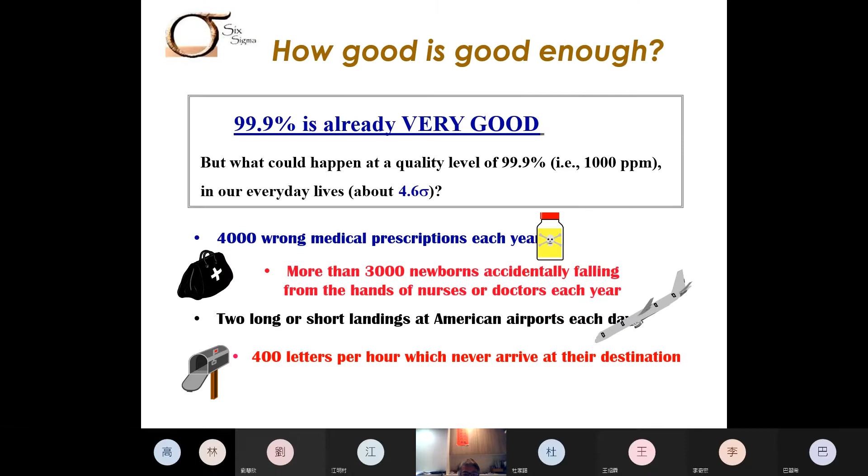So think, can you see the screen? Yes, teacher. Yeah, I think no, I need to get it larger. Is that better?

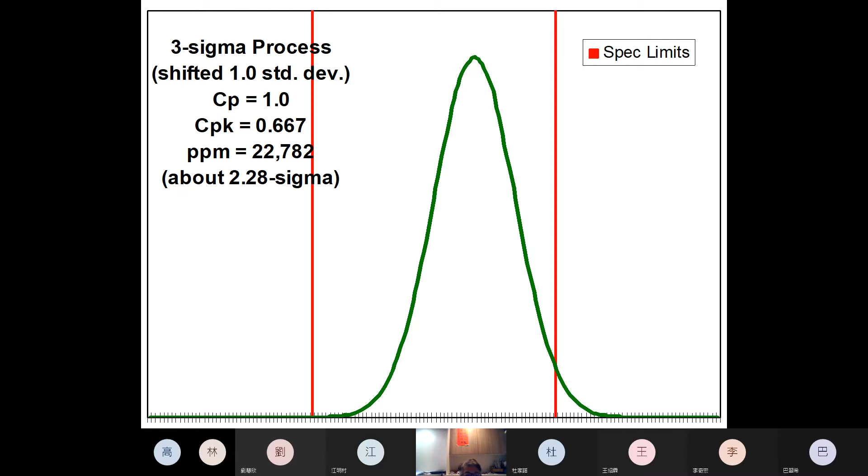Okay, so let's get started. We have last time where we're getting at. We're getting at MSA. Which page are we getting on?

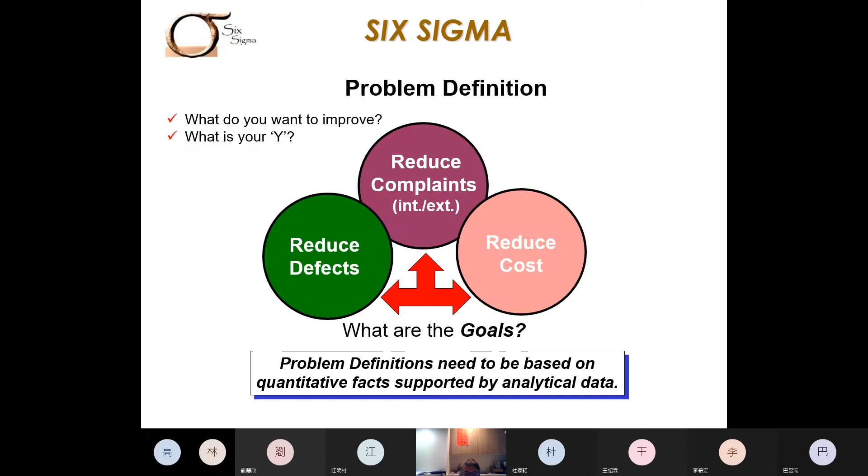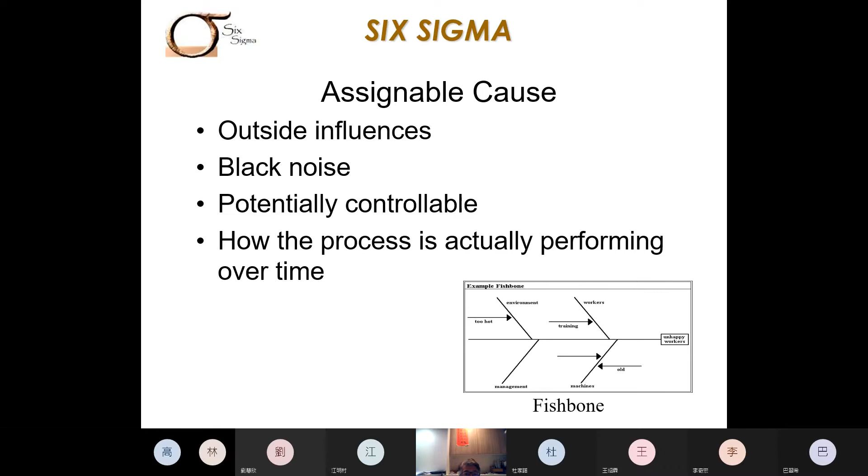The baseline. Not this one. Yeah, we have done this, right? The outside, the noises, potentials, the common causes, gauge. We mentioned this before, right? Did we? Yes. Okay, so it's this page we're getting on, right?

We're getting at. So map the process. So map that means, okay. So please also open your text dialog box. So this is the mapping the process. Try to characterize the process.

The characterize process, that means we know we need to understand the interrelationship between the x and the y's.

So actually, we always ask several questions. What problem happened and how it happened and why it happened and when it happens. So typically, we ask this kind of question, try to identify what kind of problem we try to solve.

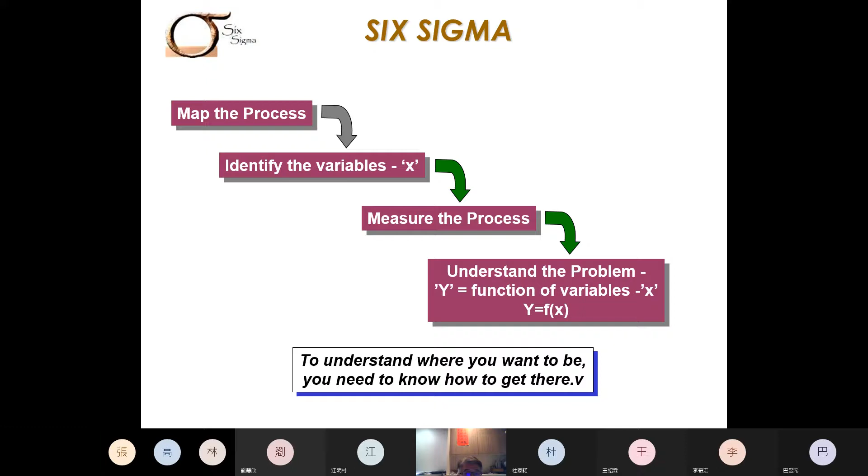Have you recapitulated? Okay, then we move on. So now we are in the process moving to the stage of evaluate. We understand the process, we take the measurement, and we like to evaluate how we can understand the process—we call it process characterization. Once we have a basic understanding of the process, then we try to improve and verify the process, and maintain the process. This is how this working loop for Six Sigma goes.

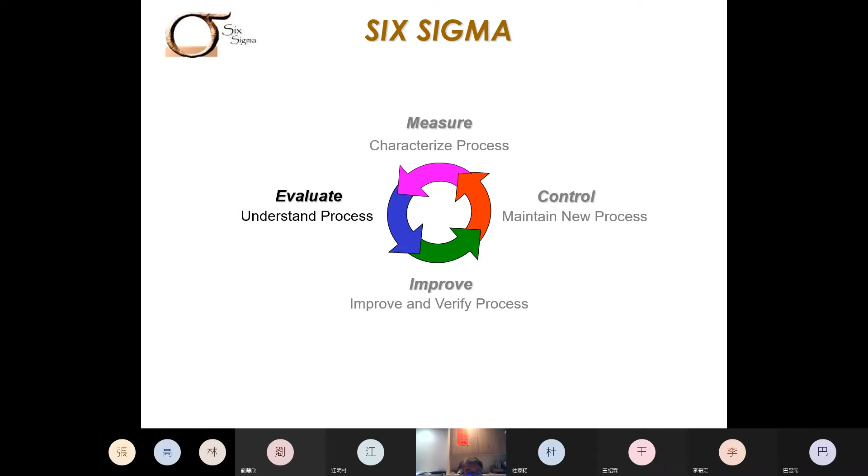Okay, then in many cases, the process capability—we mentioned this. Would some of you like to share what is the process capability?

Okay, so what is the process capability? Will anyone of you like to share your idea with us? Meng, would you like to share with us? Sorry, I don't know. Okay, process capability we introduced.

So process capability, that means when we like to accept the order, and manufacture the product for our customer, the customer is going to have a specification. The process capability is used to determine: are we capable enough to accept the manufacturing order from our customer? Are we able to make a qualified product for our customer?

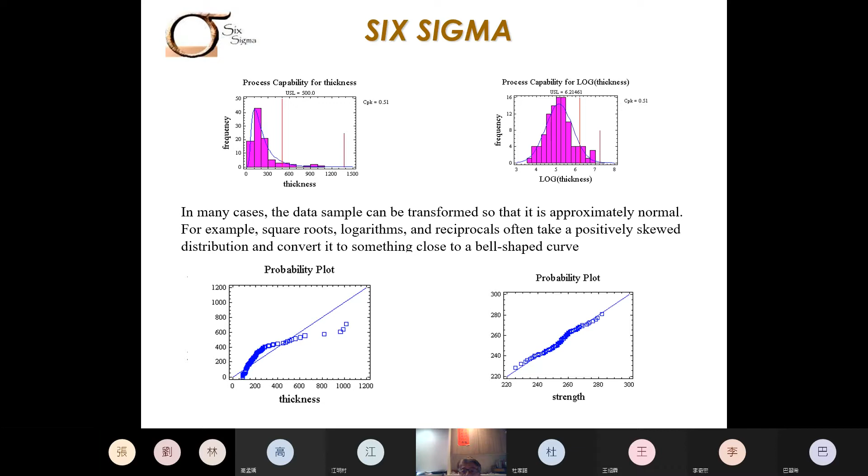Can you see the screen yet? I think you do, right? Can you see the mouse? Yes teacher, yes, okay cool. Yeah, I think that's better, this is better.

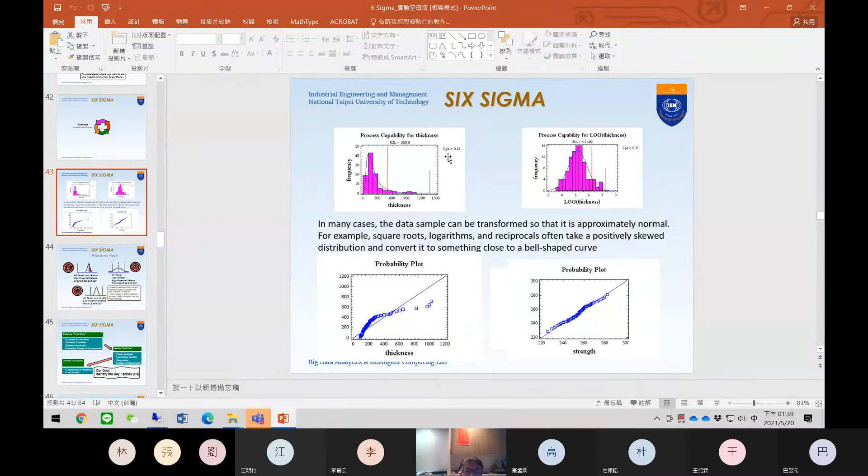So what is the problem of this process? Somebody? Yeah, Patricia? So you can see the CPK is quite low. The 0.51 is quite low, between the lower specification limit and the upper specification limit. So you can see the process is not centered, right? So we're going to move, going to adjust the center of the process toward the right in order to fall within the limit, right? Then what is the problem of the process on the right?

The standard deviation is way too high, so we're going to reduce the standard deviation. So let me type in then. The process on the right, no, on the left, I'm sorry. The problem is we try to bring or move the process to the right. So the process on the right, so we try to reduce the process variability. So different processes have their different problems.

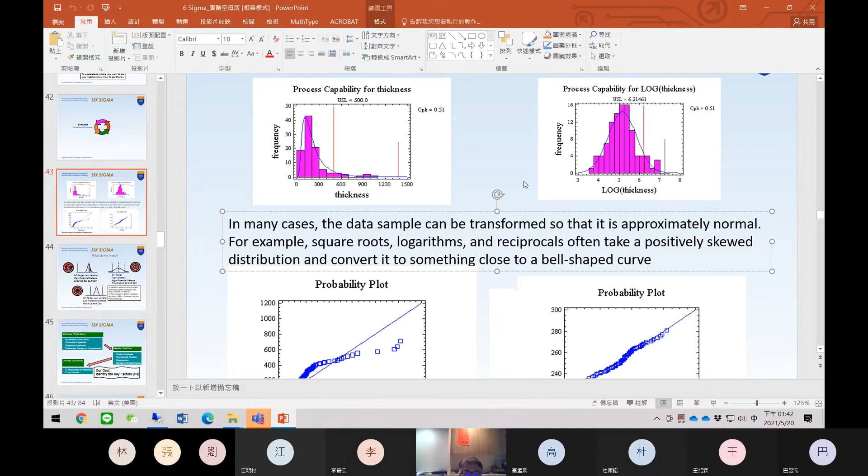For example, square root or logarithm or reciprocal often make a positive skew distribution like this one converted to something close to the bell shape. This is a skew, this is a right skew distribution, right? So typically we use a square root or logarithm or reciprocal to make it into the bell shape like this. So you can see the normal probability plot like this - this is quite deviant, quite remote from the normal distribution. After transformation, it performed better and closer to the normal distribution we expect.

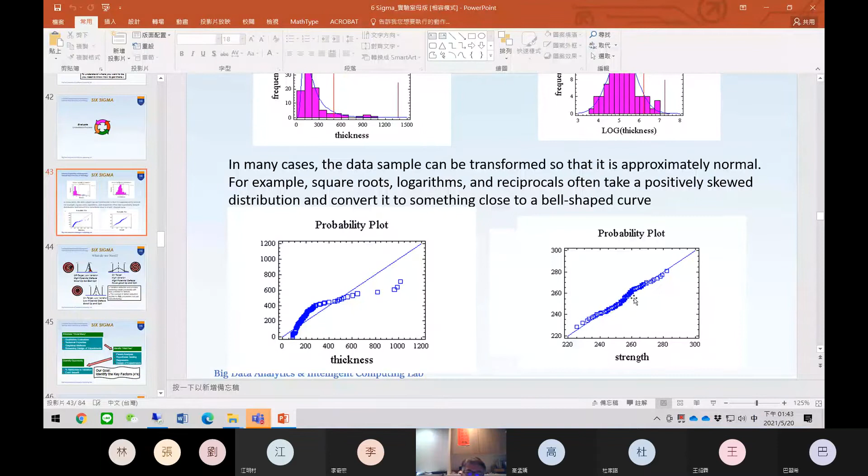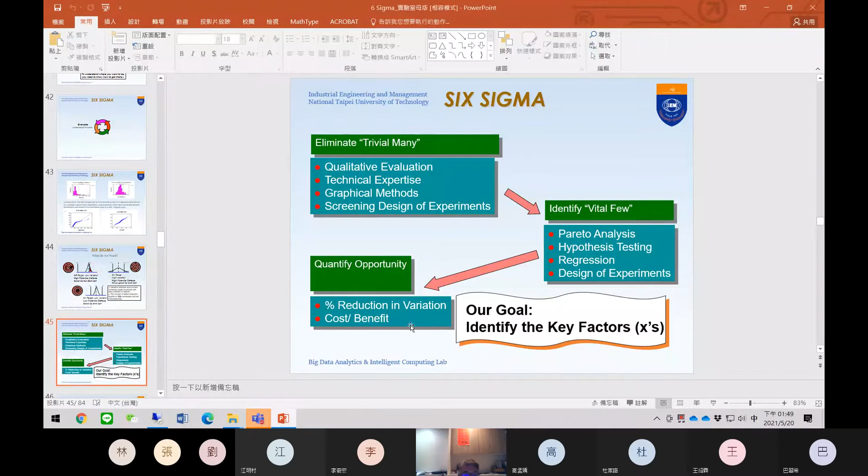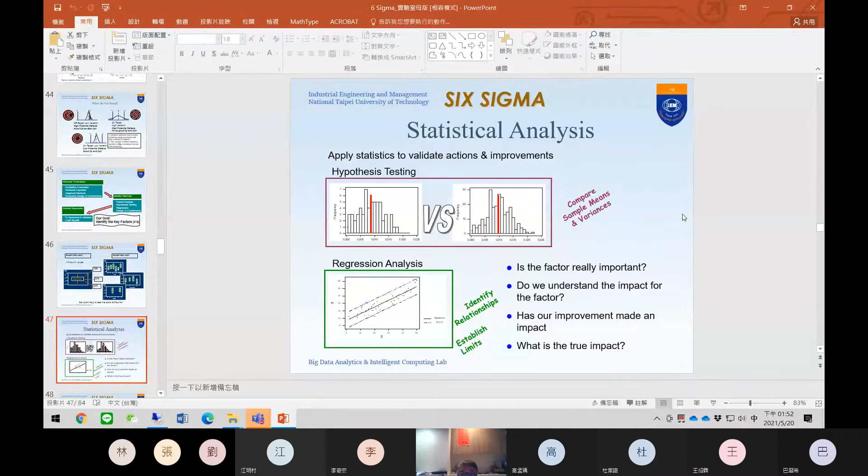Okay, then statistical analysis - apply statistics to validate action and improvement. Let me just enlarge the illustration. So compare the sample mean and variances - hypothesis testing. This is before, maybe this is after; maybe this is method A, this is method B; maybe this is machine A, machine B, assembly line A, assembly line B, or operator A or operator B. Apply statistics to validate the action.

So we do some action - does it really make significant improvement or not? So do the hypothesis testing, collect the data, and perform the statistical analysis to compare the two populations to see if there is significance or not.

So this is called hypothesis testing - there's an H-naught versus the HA. H-naught, this is known as the null hypothesis. And HA, this is known as the alternative hypothesis.

Typically, we also use alpha - the level of significance. So that means this is a Type 1 error, like COVID-19. What is called Type 1 error? Type 1 error is also known as alpha. In COVID-19 or data science, it's also called a false positive.

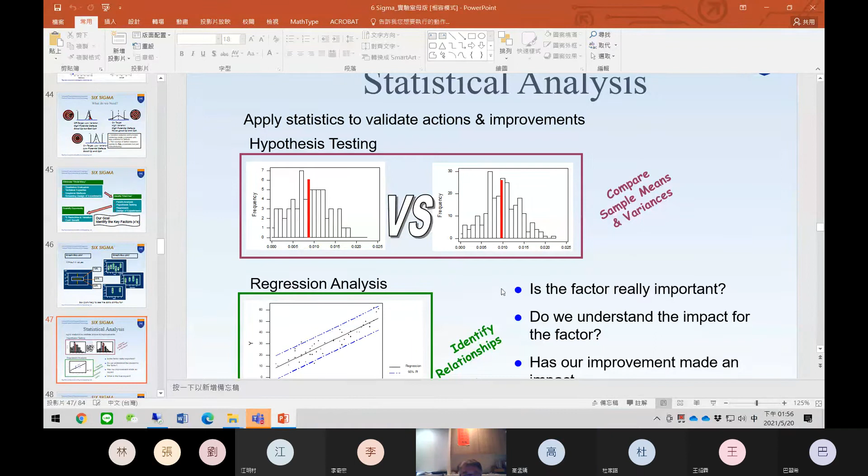So we go back to the slide, and then we also do the regression. So somebody answer me, what is the regression for? Why do we need to perform regression analysis? Why do we? Somebody? Yeah, Carl.

Yeah, so Lin Zhang. Okay. Lin Jiwei. Who is Lin Jiwei? Is Lin Jiwei here? Yes. Okay, we'd like to say something about why do we need to perform regression?

To predict. Yeah, that's cool, that's cool. You said the keyword, thank you. So that's cool - prediction, forecasting. Thank you, enjoy it, appreciate it.

So back to here, is the factor really important? Yeah - identify relationship, this is input and output relationship. This is regression really fitting to the data. Actually, we don't know yet.

So regression can be classified into different types. For example, we have linear regression, nonlinear regression, logistic regression, and so many others. It can also be called GLM - GLM as known as the general linear model, or some call it a generalized linear model. It's quite versatile and can be used to describe how the model fits to the data.

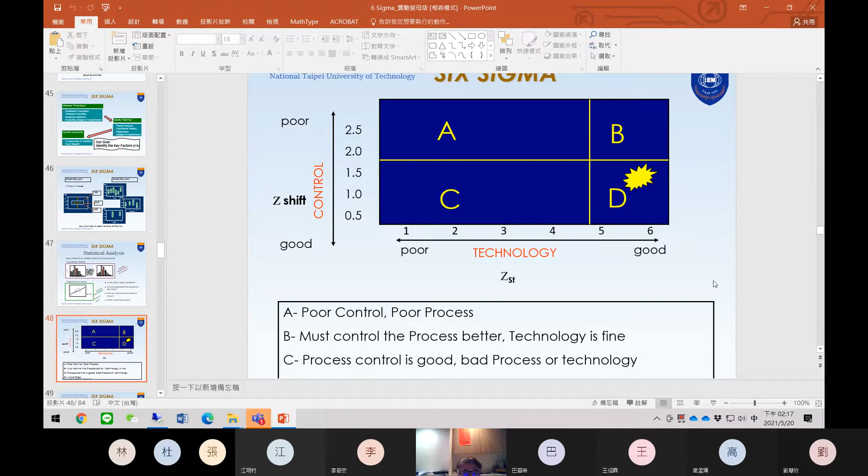Okay, back to here. This is a plot, a tool plot for the Six Sigma. Let me just enlarge it a little bit. So this is from poor to good.

This is the ZST, this is the shift, this is good, as small as possible, this is good. ST for the short term. Short term, the Z score called the short term Z score. The short term Z score means we only sample and perform the within-sample variability.

Let's see them. Let's see. Any question? Okay, sure. Okay, then we get it.

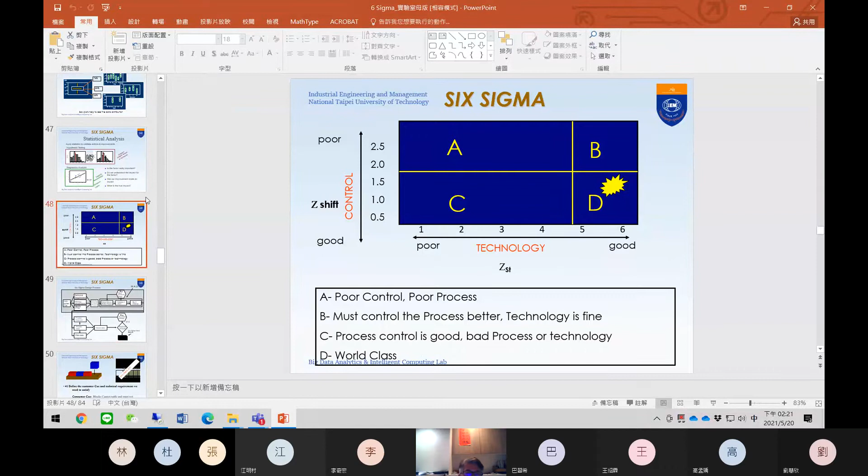So is there any possible opportunity for improvement? If this is true, then we're going. If this is not satisfactory, going back to obtain the data once again. Then calculate the Z score, if Z is not big enough, then we stop here and adjust the process and design. Go back again. This is the looping for improvement.

Then if it is done, we go to the next stage, the first piece inspection, this is called prototyping. Prototyping process, then going to the pre-pilot data, so before ramp up. Before ramp up. Yeah, before ramp up. Okay, then before ramp up, then pilot data.

So we obtain the data, then we check the Z level. Since in the design phase we already have a sufficient Z score, then in the pilot study we get the data. We need to confirm and validate the Z value, Z level can be regenerated in the pilot, ZSD can be regenerated in the pilot study.

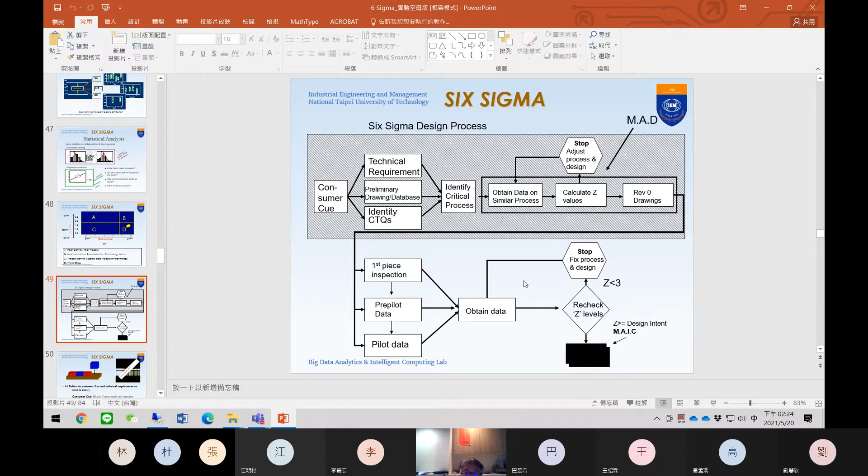Regenerating in pilot study, so check if this is less than 3. 3 is a totally quite low standard, so we need to stop and fix the process, redesign once again, like the design phase. If this is greater than the design intent, MAIC, then we go to the next one, the design phase. This is pilot study, DMA, and improvement. So going to the improvement process.

Another concept we call QFD, FMEA. So first of all, we like to define the customer cue and technical requirement we need to satisfy. So the customer cue is the block cannot rattle, must not interfere with the box, so must fit exactly on the position. So the technical requirement, there must be a positive gap, that means we need to have a tolerance, so we need to have a tolerance for manufacturability.

So define the customer cue from its own standpoint. Then later, this following technical requirement must have a positive gap to have an allowance to fit it into the entire frame. So typically, how can we know the cue from the customer, the quality, the QFD?

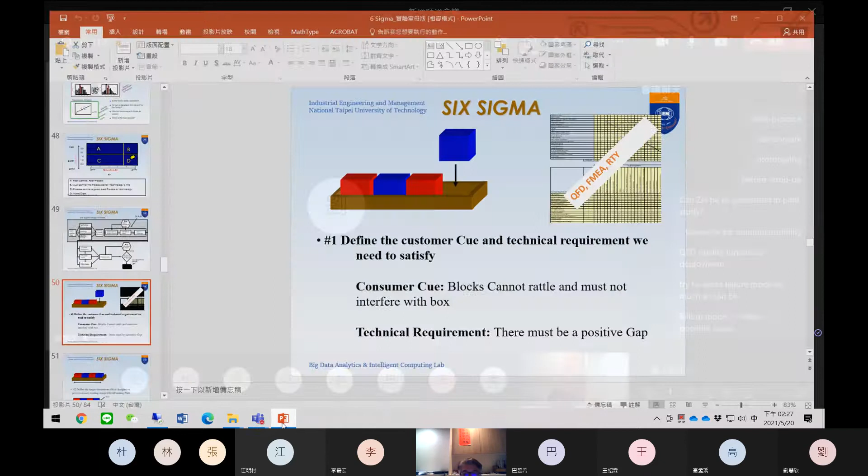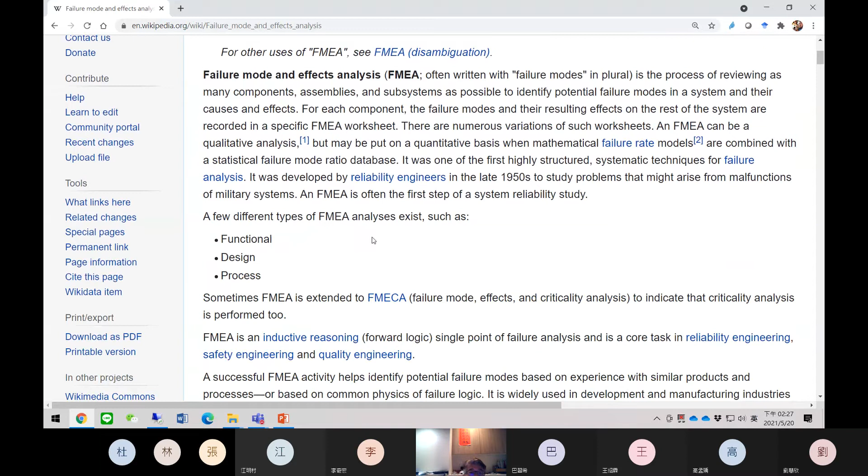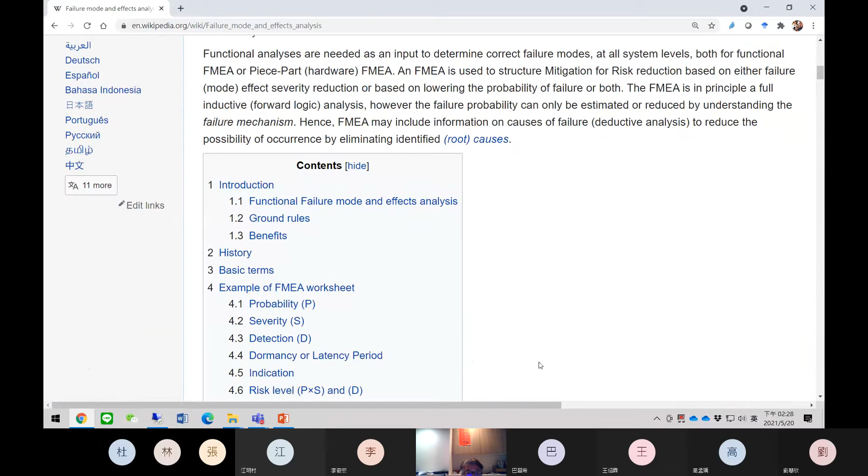Let me print it out. FMEA, let me bring you some sources from the wiki called FMEA. Okay, so this is called the failure mode effects analysis, also known as FMEA. Failure mode in plural is typically put in FMEA, although read as failure modes. A few different types of FMEA analysis exist, such as functional FMEA, design FMEA, or process FMEA. So it can be extended, not just FMECA, the failure mode effect and criticality analysis, or there's inductive reasoning forward logic analysis of the failure. Let me see if there's something else to mention.

Let me see, okay, the first example of FMEA, so the probability severity, there's some point we call the risk level, PSD. So an example of FMEA, basic terms. There's an action priority, so called RPN, this is the risk priority number. The risk priority number is defined in AIAG / VDA FMEA, published in the handbook of 2019.

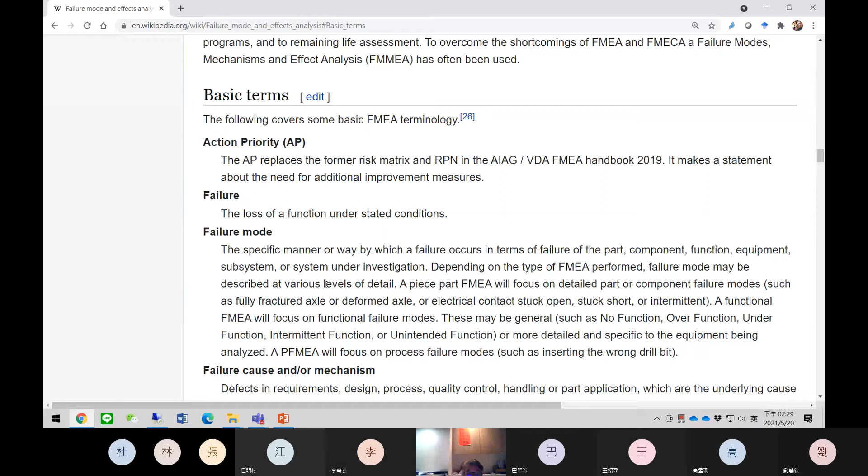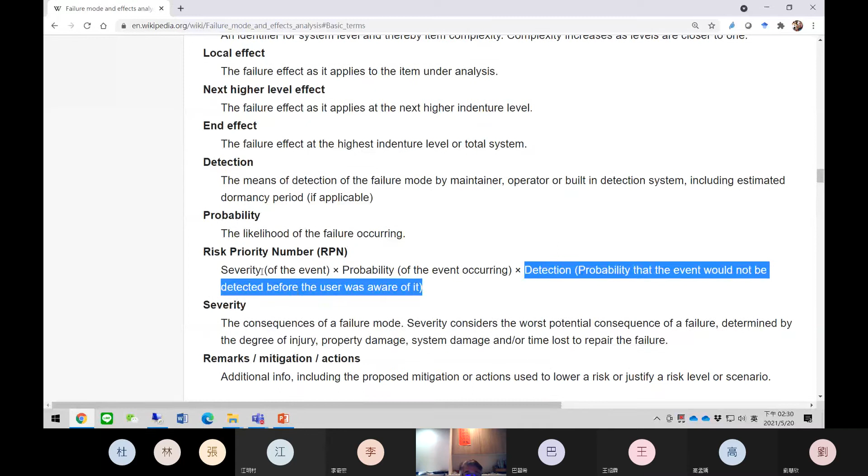Failure means loss of function under stated conditions. Then we have failure effect. The RPN, risk priority number, is defined as the multiplication of the severity number of the event - how severe it's going to be to the process, to the organization, to the department - and the probability, how often it occurs, how often the event takes place, and detectability, whether it's easy or very difficult to detect, or whether we need to invest effort or high tech for detection. That is the probability that the event would not be detected before the user became aware of it. So RPN is defined as the multiplication of severity times probability times detectability.

Okay, so this is the table example of FMEA, the example of the FMEA worksheet. I'll stop here and give you the link right here. Okay, this is FMEA, yeah, cool.

Then next one, second, define the target dimension. So target for this new design, or the process mean for existing design for all the mating parts. We just adjust the target or nominal value in order to satisfy - first of all, you need to satisfy the customer, then let the manufacturing team be able to produce those products with quality without undue difficulty. So that is called the nominal value. Somebody calls it the target value, or somebody calls it the set point. In mechanical engineering, we call it a set point.

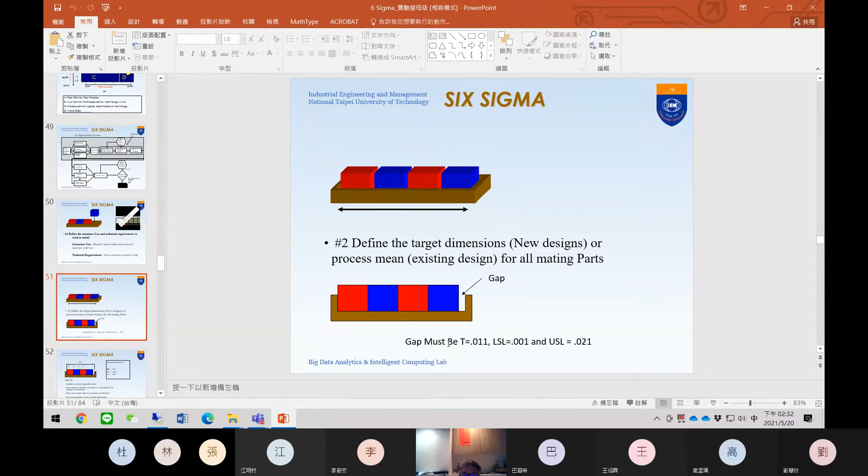So define the gap, the gap must be something like that. Okay, then...

Number 3, gather process capability data for each one, for each source of tolerance. Use the actual and similar part data to calculate the standard deviation of the largest contributor. For each one there's subject to error, so that standard deviation should be added, like SSA plus SSB plus SSC equals SS total. This idea, we call it the variance decomposition approach. So then we have upper and lower limits, and this target is only 0.01, so it must be within this range.

So we're going to add those tolerances together, this is called a plus. If we have a smaller tolerance, then there's a larger tolerance that can be satisfied with the manufacturing team, which also meets the voice of customer. So you may use expert data for minimum contributors - do not calculate from the current tolerances - and combine them together.

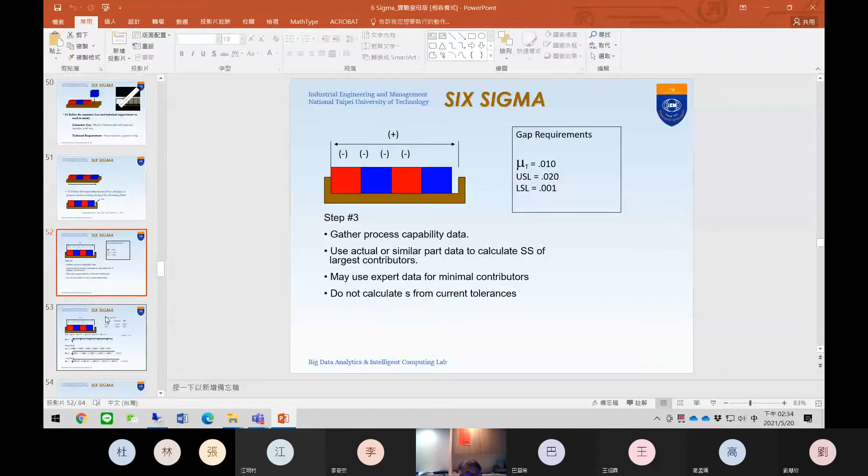Then later, like this, the gap. The gap is the box, minus cube 1, minus cube 2, minus cube 3, minus cube 4. So this is the gap right here.

So for each one, we have a short term. Within the cube, the variability is known as the sigma short term. Then the short term for the gap, 5.080 minus Q1, Q2, Q3, Q4, the 0.016 right here.

This is a gap. Then the sigma gap, this is 0.001 squared, Q1, Q2, Q3, and Q4. 1,2,3,4, 1,2,3,4 totally, and Q4, 1,2,3,4,5, and the box. The box should be accommodated. So the sigma gap right here is 0.00224.

So we also calculate the long term, the gap, the sigma gap, since this is a short term. This should be 0.0015, 0.0015, 0.0015. This number is getting from... let me see that. Where can I get this number?

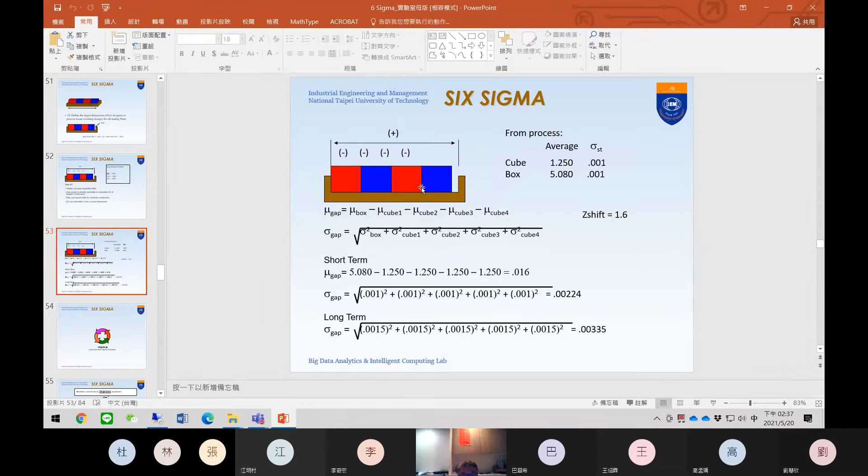Okay, so this is how we apply Six Sigma to the quite straightforward assembly line, called the manufacturability. Hold on. This is Six Sigma manufacturability applied to assembly line practice. Yeah, something like that.

Then we proceed to the improvement phase, improving the verified process. So look at that, what do we need to do to improve?

So improve means we must stay within the current resource management. That means we try to maintain the minimum level of human resources or task forces or technical support from our R&D and operating support from our manufacturing team in order to make the fine tuning.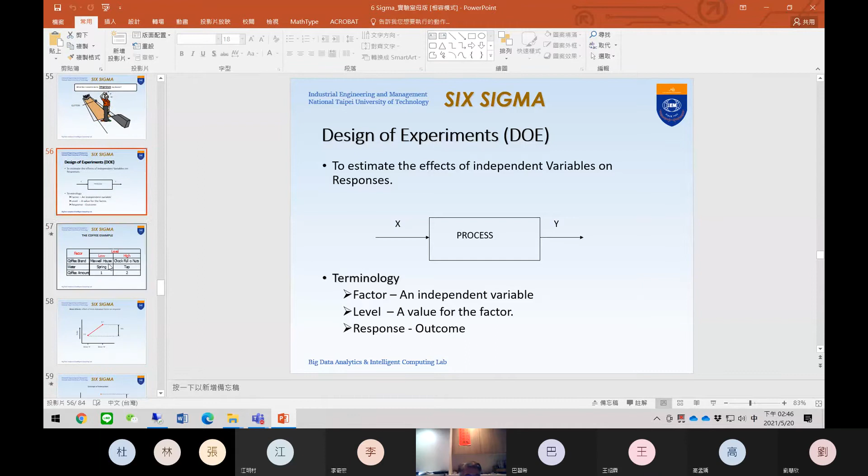Back to here, like this. This is a coffee example. Do you understand what I'm talking about? So how many factors are involved in this example? Li Qiwei? Li Qihong, for this, how many factors are involved in this example? And how many? 3. Yeah, 3. Bingo, very good.

The 3 factors: first one, the coffee brand. What kind of coffee brand? This is Maxwell, and this is Chock Full o'Nuts. The water, different water - we use spring water or tap water directly from the faucet. The coffee amount, 1 spoon or 2 spoons - that's the level. That means we have 2 levels. The brand will have 2 levels.

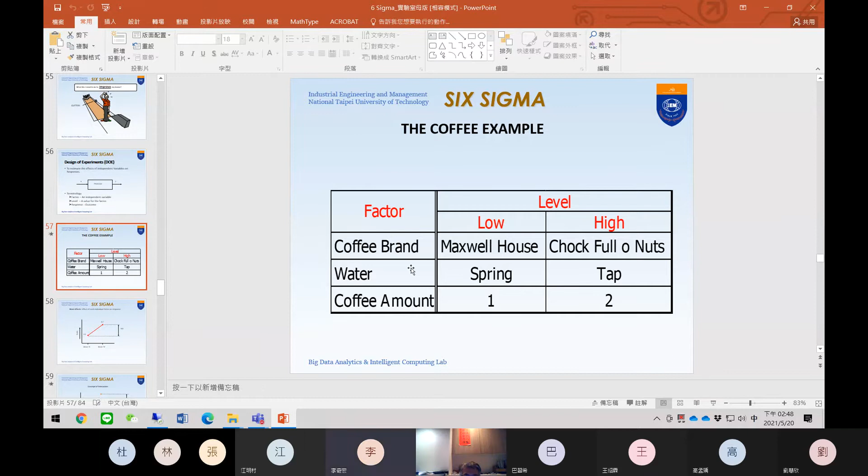Totally, how many combinations do we have, Mr. Lee? 2? No. Totally 3 factors - how many combinations? 9? Are you sure about that? Think of it one more time. First factor 2 levels, second 2 levels, third 2 levels. So totally how many levels do we have? Mengyu? 27? 27?

For 1, this is 2. How many total do we have? 2 by 2 by 2. So it's going to be 8. Right, it's going to be 8, right? Hold on, going to be 8. Okay, for each one we have 2 levels, so this is 2 raised to the power 3, that is equal to 8.

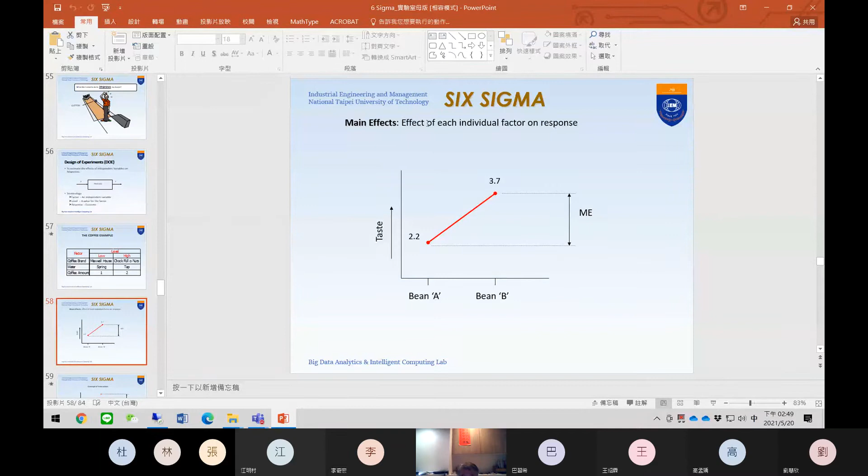Then back to here, this is the main effect - the main effect of each individual factor on responses. So for factor A, factor B, we might send a questionnaire - Q-U-E-S - to our customers. We try different combos of the coffee brand.

Use different water, 1 spoon or 2 spoons of the coffee powder, then let our subjects do tasting and respond. Do they feel it? How do they feel? Do they like it?

So we're going to use a Likert scale. The Likert scale could be 5 or 7 levels. For the 7 level, maybe this is -2, -1, 0, +1, +2 - so this is a 5 level. 0 means okay, I don't feel anything, I neither like it nor dislike it, I don't have any particular opinion. -1 means I don't like it a little bit. -2 means I don't like it very much. +1 means I like it, I tend to like it a little bit. +2 means I like it very much. So this is a 5 scale.

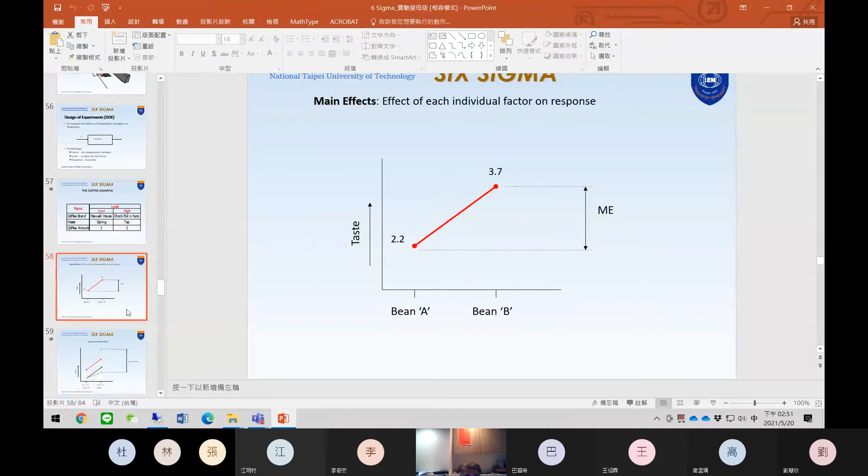So this is called the main effect, the effect of each individual factor on the response. So there are 3 major concepts here regarding main effect. Let me show you that.

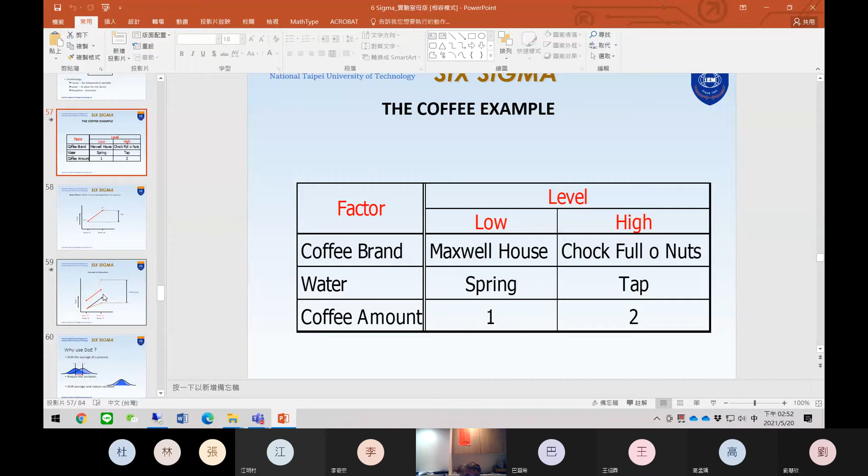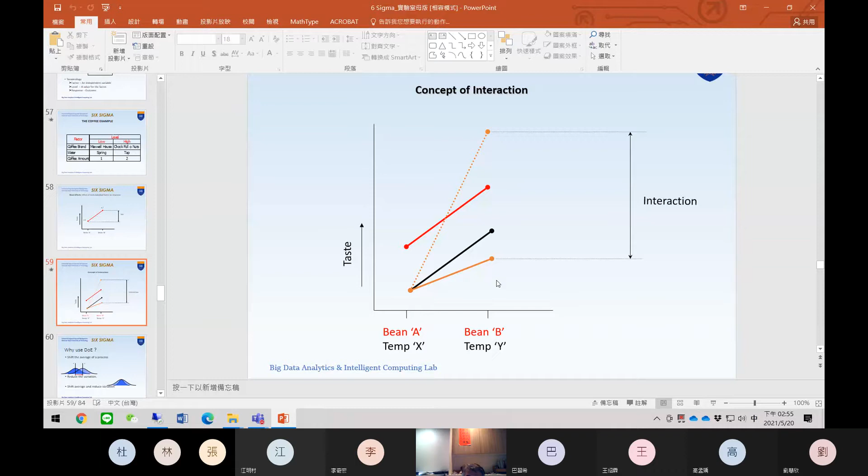These two - this is called the interaction. There's a difference. For this, maybe this is the low temperature, and this is the high temperature. So between brand A and brand B at low temperature versus high temperature, you see that the main effects are not parallel. So that means we have an interaction, something like that.

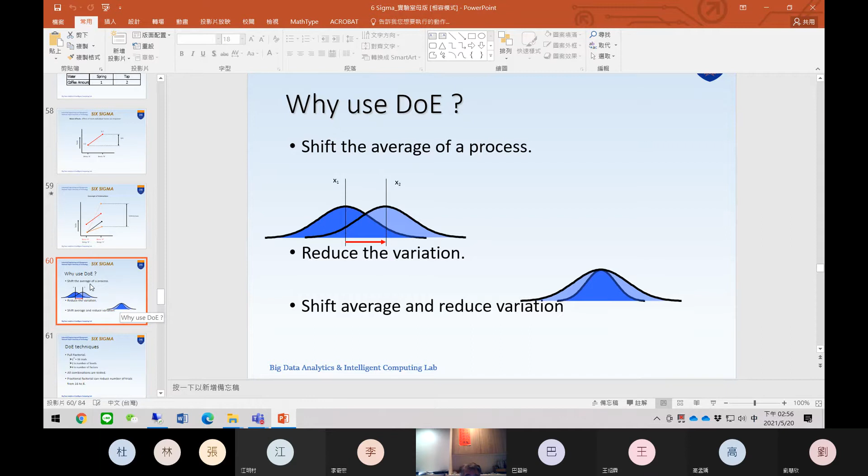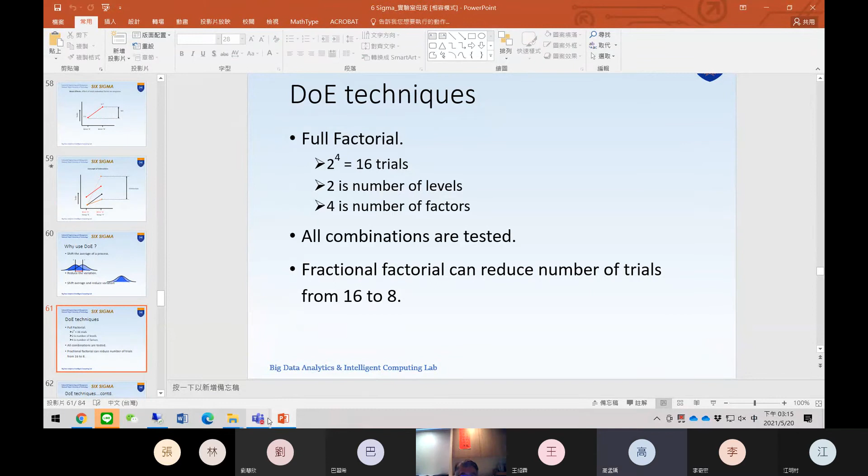So if we have 6 process variables, we like to run only a quarter. That is 6 minus 2, meaning we only have to run 16 runs. So this is 2 raised to the power of 6 minus 2, which is a quarter. So if we run half, this 6 minus 2 is a quarter.

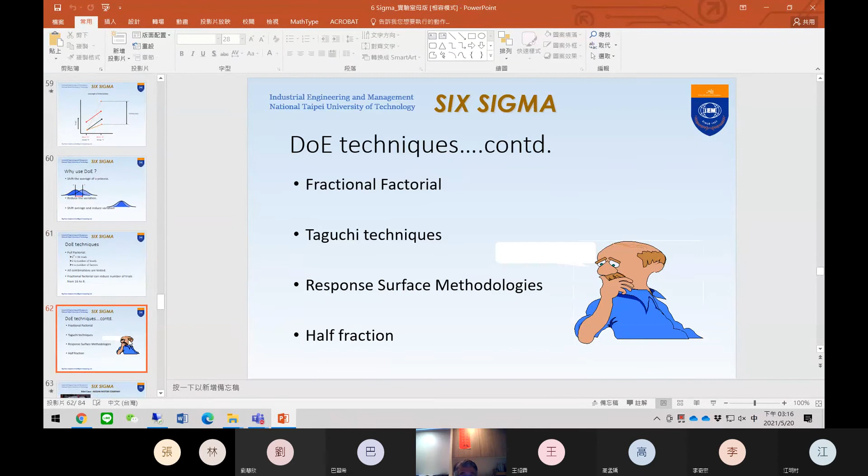Then fractional factorial can reduce the number of experimental replications. So like this.

So, design array. For the factorial you have A, the gluing strength, this is output, this is the response variable. Effect A plus and minus. This is high, this is low. This is high, this is low, high, low, high, low. A, B, C, D, for each one, this is a total of 16.

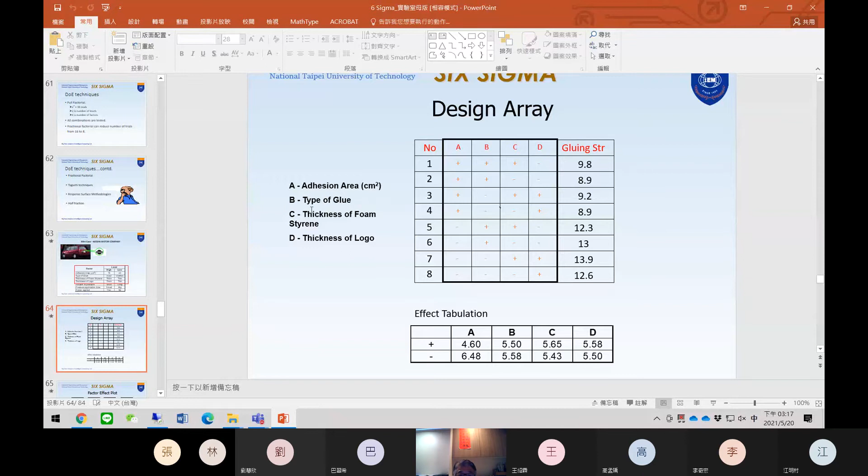However, we only run 8. So adhesion area is type of glue, thickness of foam styrene, and thickness of logo.

Performing the main effect, we can see the adhesion area. This is a positive main effect since we have a positive slope. A positive slope means a positive effect. If we have a negative slope, it means a negative effect.

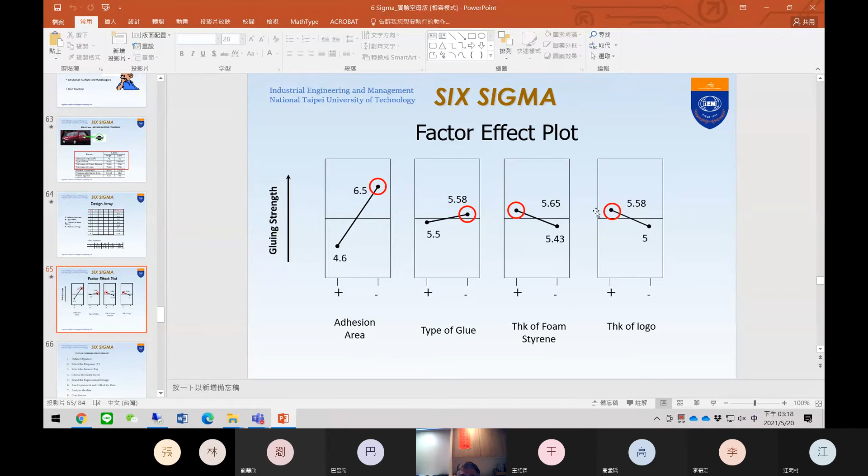Quite straightforward. For the type, it doesn't seem like much difference across horizontal. Increase from 5.5 to 5.58, this is negative. This is from negative to positive. Well, it depends how you look at that. This is negative, this is negative. So this is a circle or logo.

Design, or we're going to see other factorial, or this is a Taguchi design, factorial design, Taguchi design, or fractional factorial design. It's frequently used as well. Do you have any idea what kind of other design can be used?

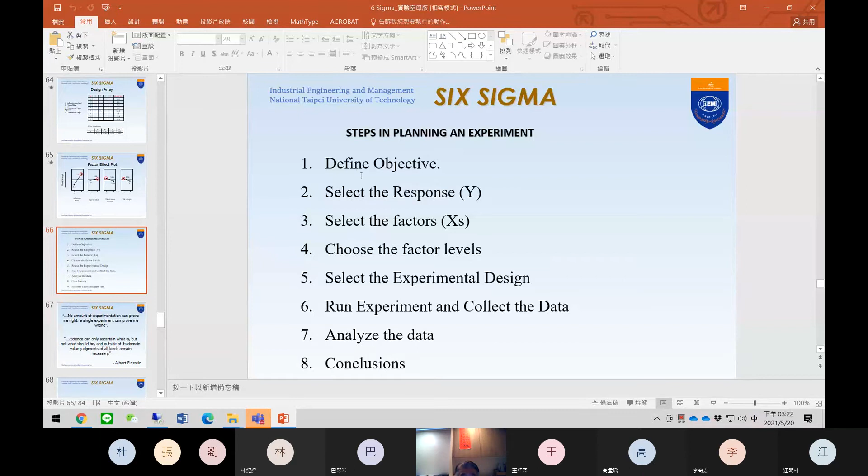Okay, then select experimental design, run experiment, collect the data, analyze the data, and draw the conclusion. Going back to validate our objective. So then we're almost there.

I think according to our text and PPT, no amount of experimentation can prove me right, but you say run as many experiments as possible. I think that is sometimes a waste of time and materials.

Yeah, that's cool. So we have limited resources, so we have to run a reasonable amount of experiments. That gives us some level of confidence, so we can get the result and trust it. However, only one experiment can prove us wrong, since as long as we run a single experiment that proves us wrong, we're going to think whether any particular experimental procedure is mistakenly designed or mistakenly planned.

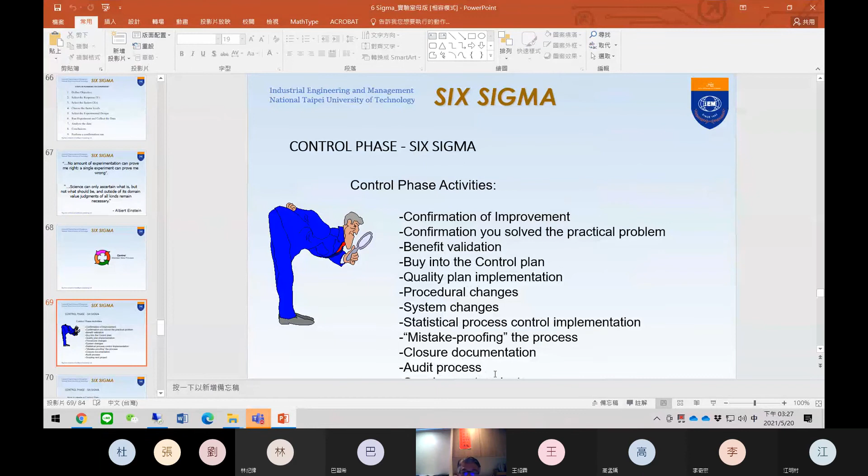Then buy into the control plan: quality plan implementation, procedure change, system change, statistical process control. There's the SPC chart, statistical process control. And mistake-proofing the process, like poka-yoke, this is called error proofing.

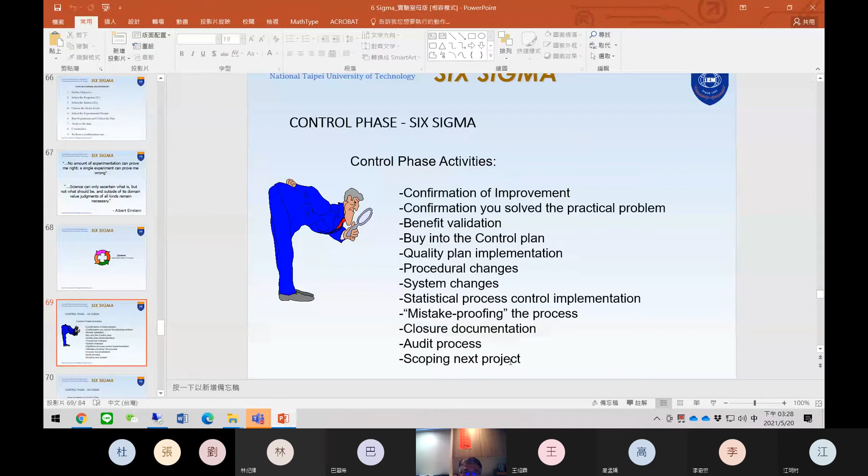So in the control phase, how do we create a control plan? Select the causal variable, proven vital few, and define the control plan: the 5W and the why, how, and when. The optimal range, validate the control plan, observe the Y. Finally, implement and document the control plan.

Audit the control plan, finally monitor performance metrics. So performance metrics, maybe we're going to evaluate the output metrics in terms of yield. It could be the defect rate or the throughput, throughput or productivity or OEE, overall equipment effectiveness. They call it OEE, typically utilized by the semiconductor fab.

Something else? We like to evaluate our throughput, monitor performance matrix. Is there any other performance matrix? I just gave you so many examples. Is there anything else you can think of? Somebody?

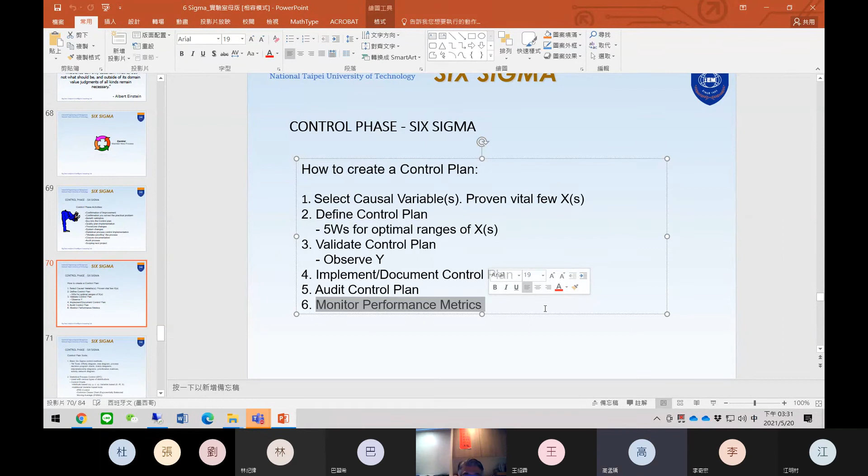We try to monitor performance metrics. How can we maintain the status quo, maintain the quality output? Is there any particular matrix that can be used for performance monitoring and performance evaluation? What kind of index can be used to determine if the process is good or not? Like this we have yield, process yield, defect rate, throughput, productivity, OEE. Anything else?

Yeah, Mengyu, you are on the street, right? I hear some car rolling past you. No? Are you at home? So are you at home or somewhere else, or are you in 7-Eleven? Oh, I'm in my room. Okay, in your room, all right.

So I think flow rate is... Oh, flow rate, can you explain what kind of flow rate you are mentioning? Let's say semiconductor, and inside maybe there are some flows. Oh okay, I see, okay I understand. Cycle time. Cool, cycle time, okay, from the raw material coming to the fab and coming out. So what is the cycle time? We'd like to reduce it. So cycle time reduction, that's cool.

Then Jiang Mingchuan, anything else? Cool. Or Jiwei? Maybe lifetime. Lifetime, okay, yeah, cycle time for the product, cool. Product lifetime. Lifetime, that's cool, yeah, that's good. They're really good, product lifetime.

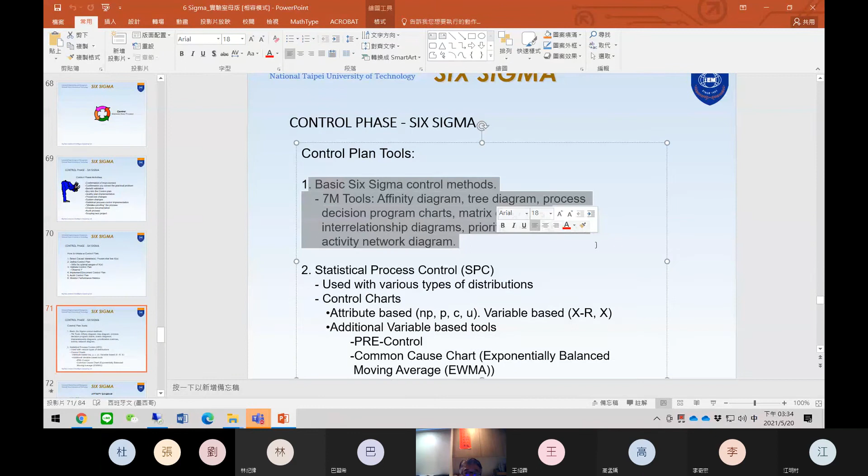There's some explanation, so I won't get too much into details. Statistical process control uses various types of control charts, like the variable control chart - S, R, or X bar - and the attribute control chart - NP, P, C, U, and so on. There's also additional variable control charts like EWMA, pre-control chart, or CUSUM - cumulative sum, known as a CUSUM chart.

I think I've almost finished this chapter, so let me just go through the affinity diagram very quickly.

The characteristic of the affinity diagram is organizing ideas into meaningful categories. This is quite conceptual modeling - data reduction, taking a large number of quality or quantity inputs into major dimensions or categories. This kind of method makes it easier for users, like in innovation.

This is product management - the overall goal of the software, knowledge of the competitors. This is from outside - the 5 forces.

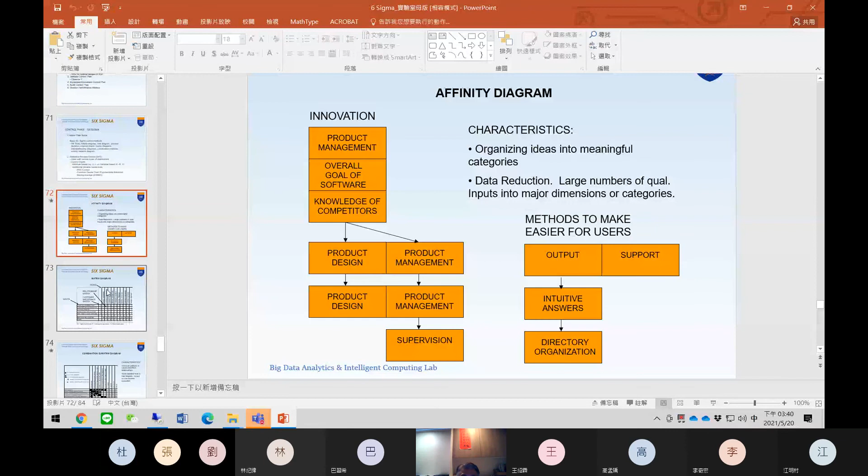Based upon this, we create a matrix. According to the matrix, importance is multiplied together for each item, with the corresponding importance score, and we rank it from highest to lowest.

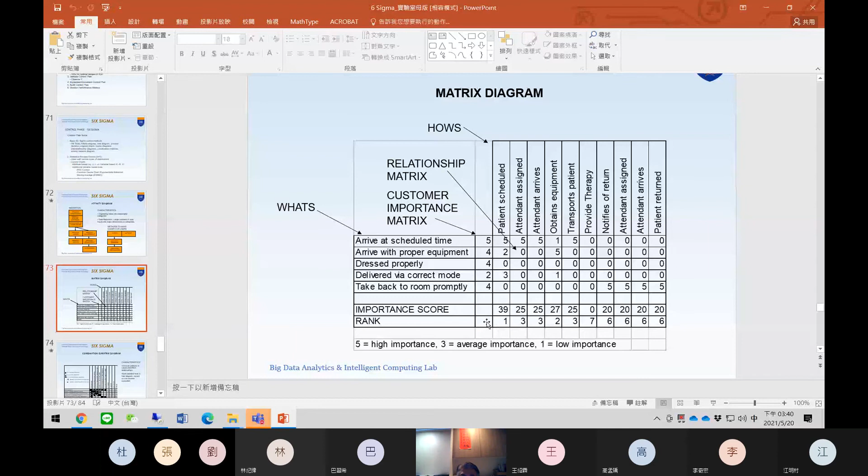This is a combination ID matrix diagram. This feature makes the existing product faster - strong influence is 9, this is 1.

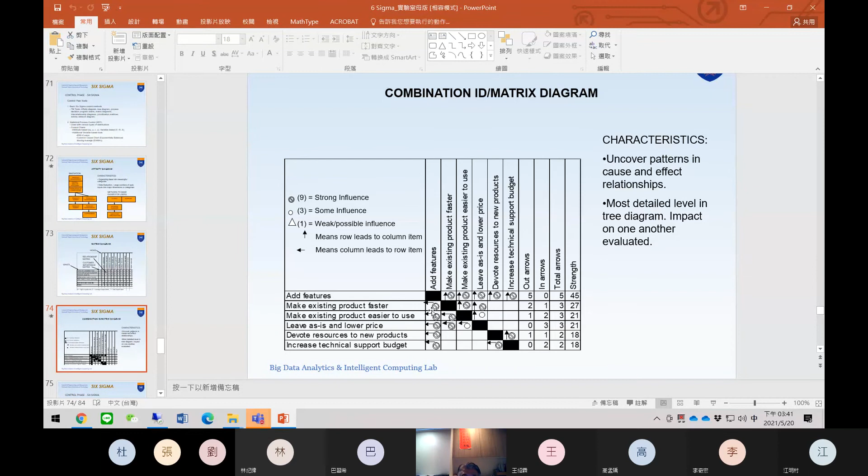We use different symbols in the circle - like a Ghostbuster diagram, with circles, triangles, something like that. Okay, only for your reference.

So many tools available in Six Sigma - control plan Six Sigma, Sigma control 7M tools. I mentioned this already.

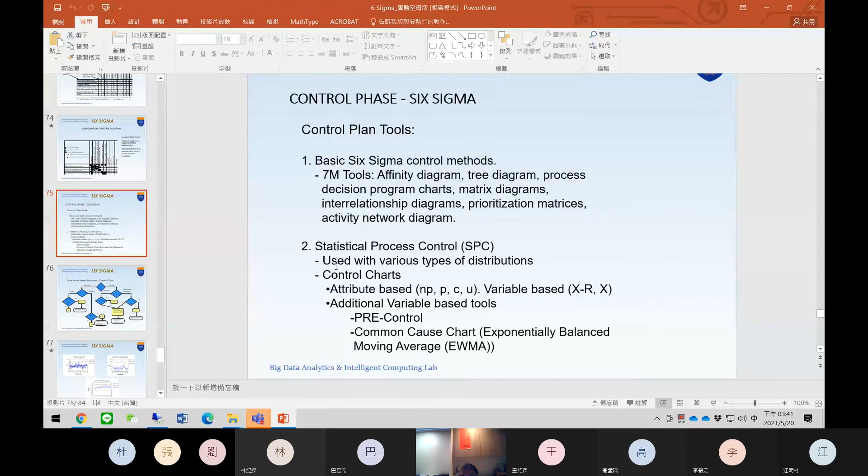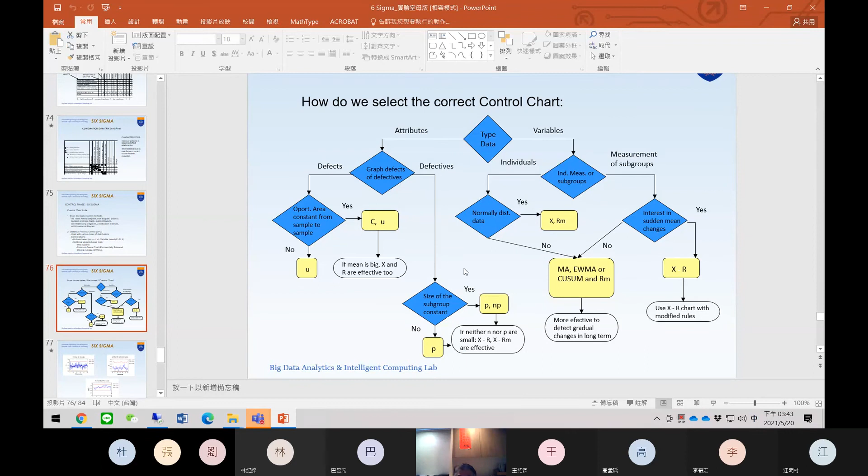So this is for the attribute control chart on the left. On the right, if the variable is individual and normally distributed, we use the X and Rm chart. If we have batches or groups of measurements, subgrouping, and we're interested in a sudden mean change, a big change, we use the X and R chart. If it's not a sudden change, we like to use a moving average, Cusum, or EWMA. So this is on the right, for the variable control chart.

Then there's an example, right? And I just enlarged it. So the X chart, upper control limit and lower control limit.

And for the P chart, things from sample to sample, they have different sample sizes for different sums. So a different sample size is going to have a different standard error of the fractional proportion due to the different sizes.

So like this, you can see the jigsaw pattern, since the lower bound could be negative. But P is a proportion, so it cannot be negative - the minimum value is 0. P cannot be negative, no way, so the lower bound has to be greater than or equal to 0.

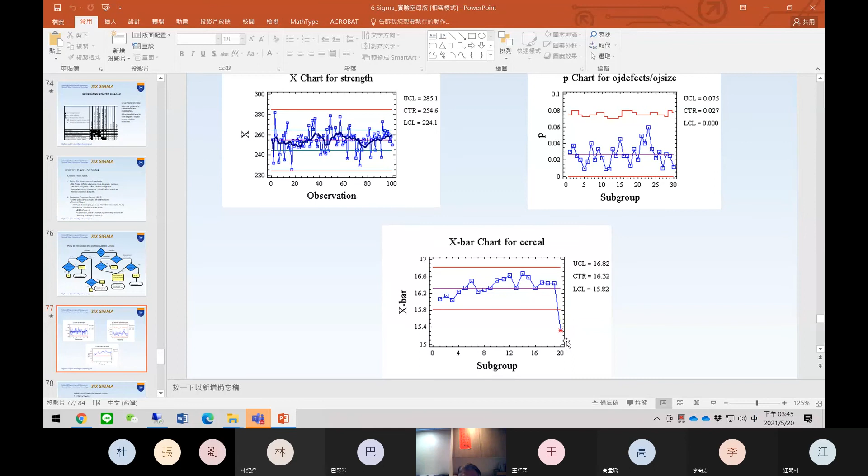So see that, and then this X-bar chart for cereal data. So from sample 1 to sample 19 it behaves well. Suddenly at 20, there's a point - a product - outside the lower control limit. So this is a signal, a signal of process abnormality. So we call this, yeah.

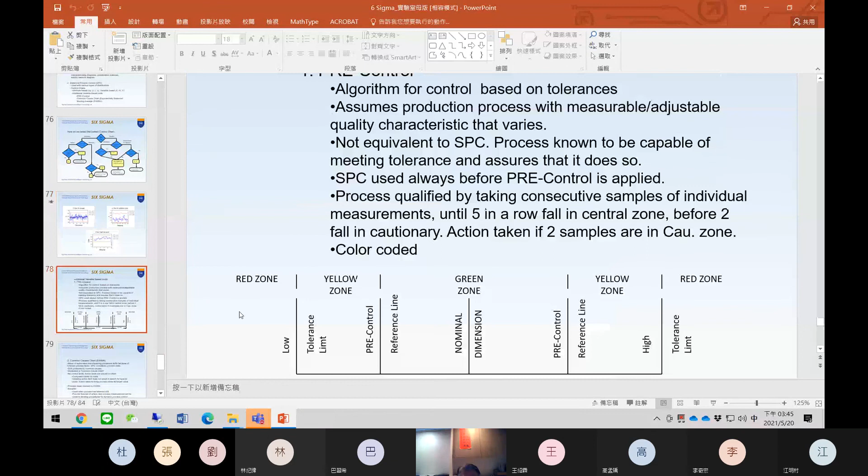Okay, then pre-control. The additional variable-based tool called pre-control. This is an algorithm for control based on tolerance, called tolerance design, related to tolerance design. This is the third phase of the Taguchi method, tolerance design.

In Taguchi's quality engineering, okay. So we assume the production process has measurable, adjustable quality characteristics that vary from batch to batch, not equivalent to SPC. The process is known to be capable of meeting tolerance and assured that it does so. So SPC is always used before pre-control is applied.

So then the process is qualified by taking consecutive samples, several individual measurements, until 5 in a row fall within the central zone. This is called pre-control. So before we ramp up, we need pre-control.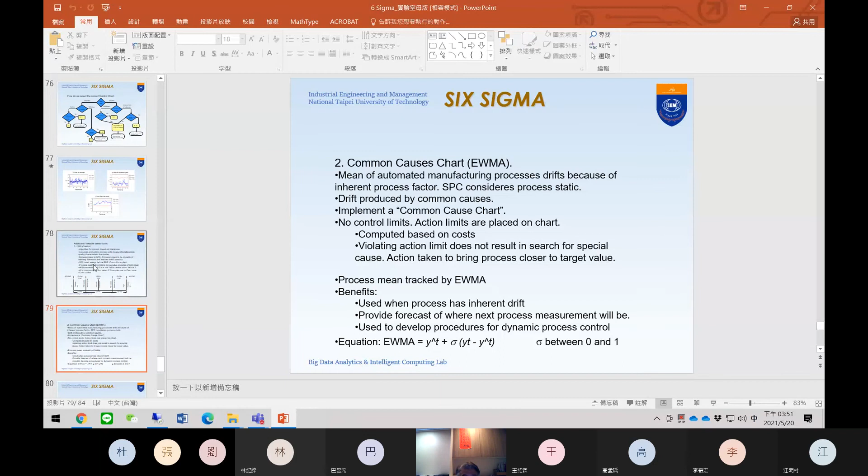I will not get into too much detail on anything else.

So this is EWMA. The EWMA chart is more responsive than the X-bar chart. Yeah, this is much more sensitive.

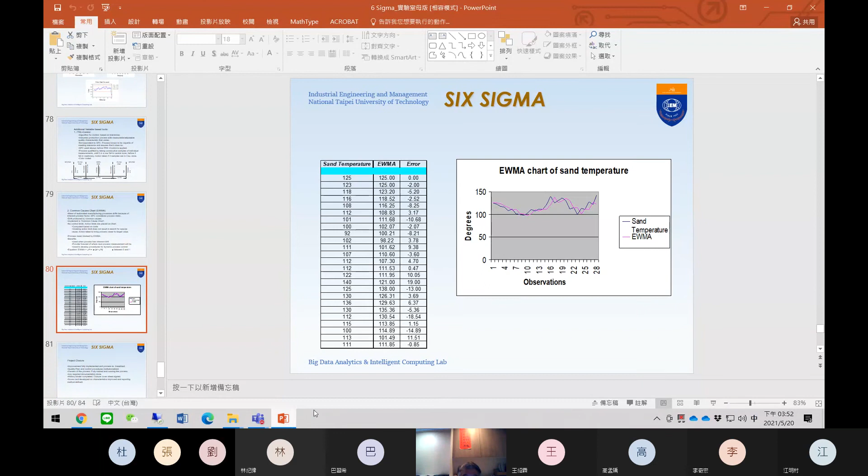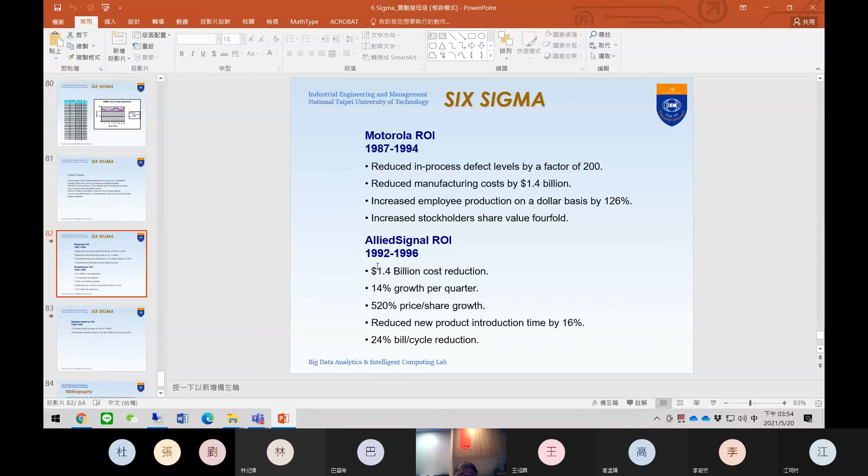What kind of method defined? Motorola's return on investment between 87 and 94 - there's some performance by applying Six Sigma. There's something good about the application of Six Sigma. This is AlliedSignal's return of 1.4 billion. This is just for your reference.